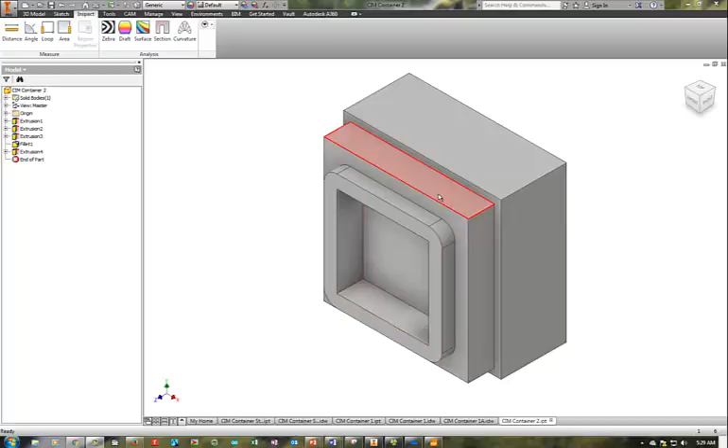Here we are back with our partially completed CIM container. What we want to do now is create the top on the other side of the stock, and to do that we're going to project some of the geometry that we've already created here. So let's do that.

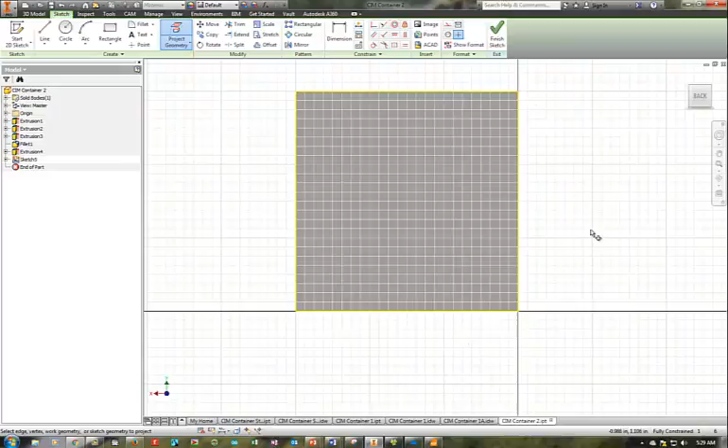Let me turn it around to the other side, create a sketch here, and I'm going to project again the geometry. Whoops, I don't want to do that. I want to project the geometry of the perimeter, and you can see the yellow lines indicating that. And I want to go back to the front side, and I want to project this part right here. So basically I'm projecting this perimeter so that I can have the sides of the top and bottom flush with one another. So let me do that.

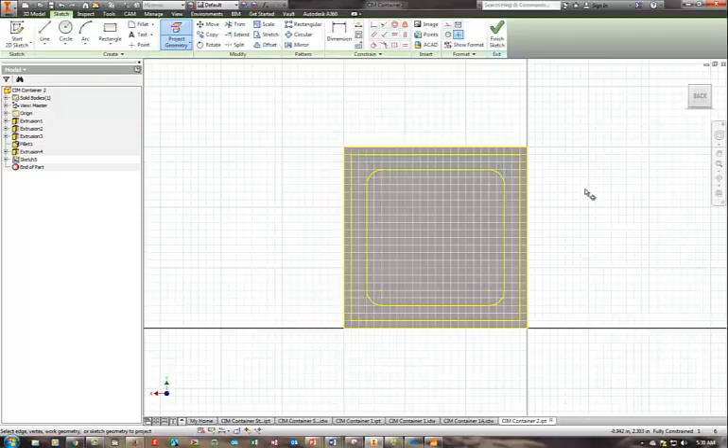I click there and take a look back on the other side. You can see that that's been projected. Now I'm only really interested in this outer one because I'm defining the outside sides of the top. So let me just go ahead and finish the sketch and extrude.

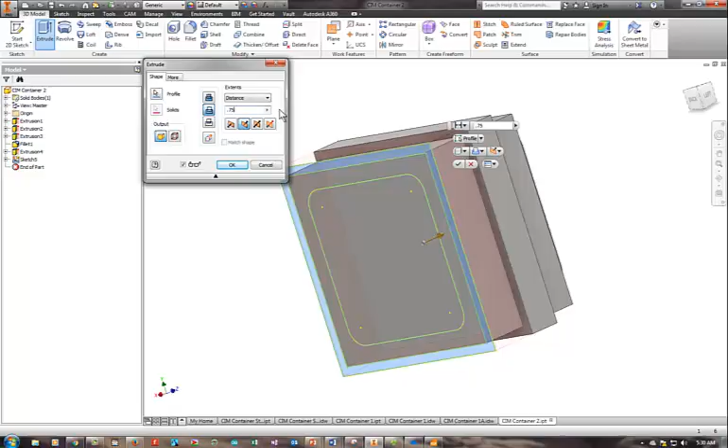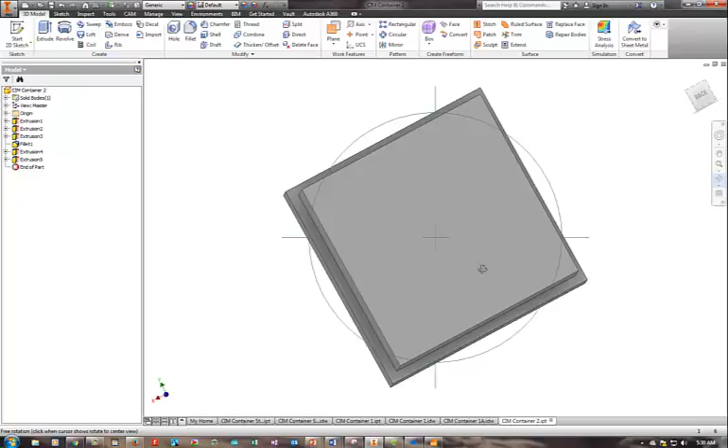And I do want to make that a cut, and I want to go down 0.75 as I did with the bottom. So now I've sort of gotten rid of all the inaccuracies and irregularities on my stock. I've got a nice, exactly dimensioned outside which matches my bottom here. And now I can proceed to make the hole here, which will again fit over this lip.

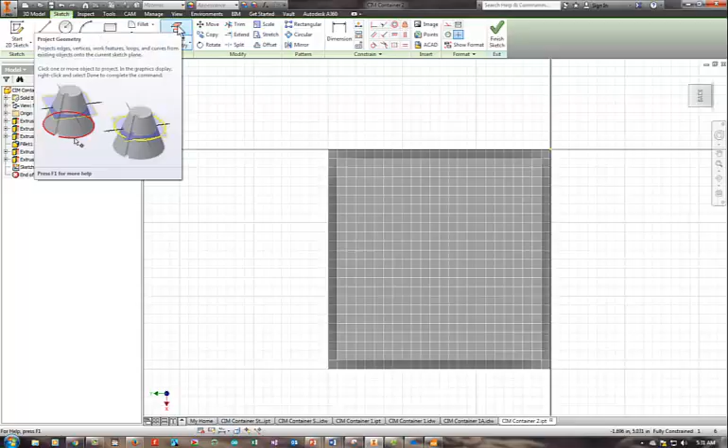So this side is a little easier. To do that, I want to make a sketch here, and again I think I want to project the circumference or perimeter there.

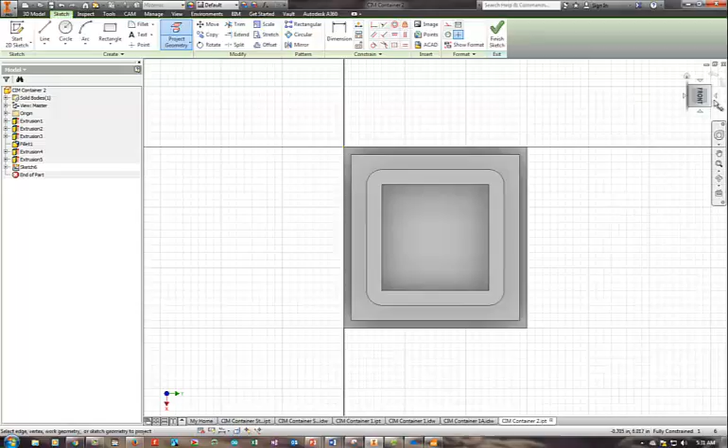And now what I want to do is find a way to get this geometry here that I'm highlighting, turning red, over to the other side, and I'm just going to pull it out a little bit to make it a little bit bigger so it fits over this. So to do that, I'm going to project the geometry, that geometry, and I am going to turn it around, and there it is.

So this should become clear maybe later after you've done this and thought about it a little more, but what I want to do is take this surface, this edge here, and pull it out just a little bit so that it fits over the other side.

And with the material we're going to use, we're going to start with a tolerance of 0.002 inches, 2/1000ths of an inch.

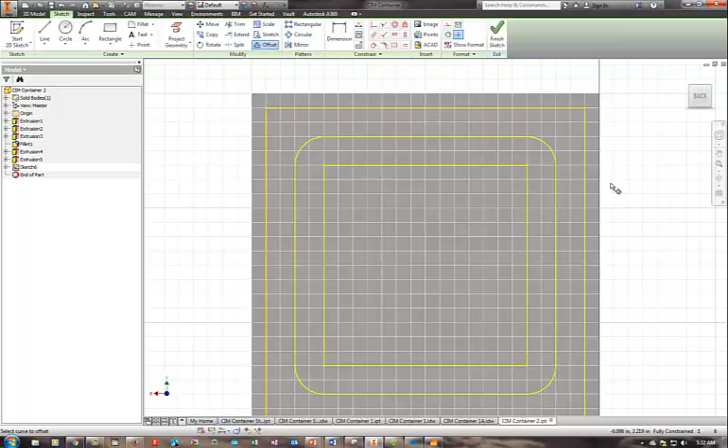Okay, so again I'm going to use the offset tool, and I'm going to zoom up a little bit, and I'm going to click here and pull out, 0.004, no, 2.

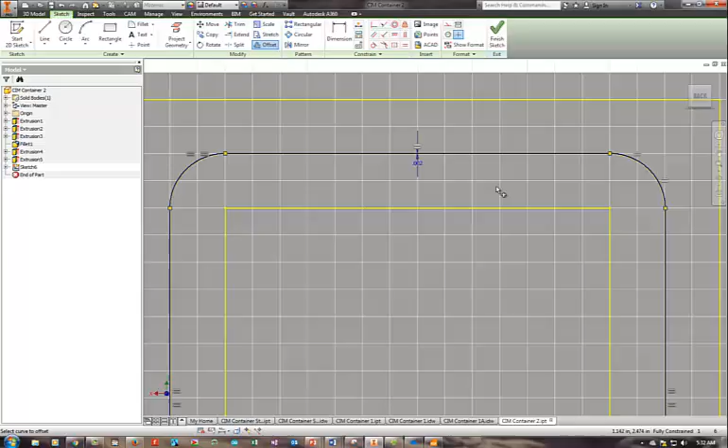So we're really asking our machine to be pretty accurate there. And as you can see, once I scoot up a little bit, that's a little bigger than what the other side has. So this guy is going to fit over this guy.

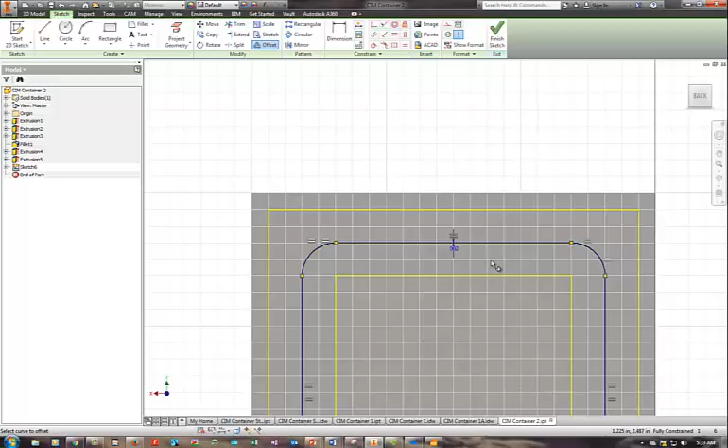Okay, now here's a trick that we can use. We want to extrude out everything inside the blue here. We want to extrude it in, and that'll be the cavity of our top, the interior cavity. A trick to get that to work, rather than having to get microscopic and click there and there and then there and then that's one more, I think, isn't there?

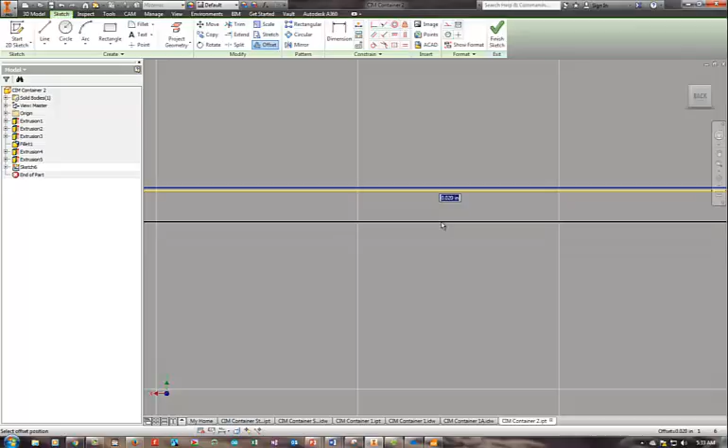There. What I'm going to do is turn each of these projected features into a construction line. So if I click there and there. Whoops. I think I'm still, oh, I'm still in offset. Okay, so if I'm outside of offset now, I can just make that a construction line.

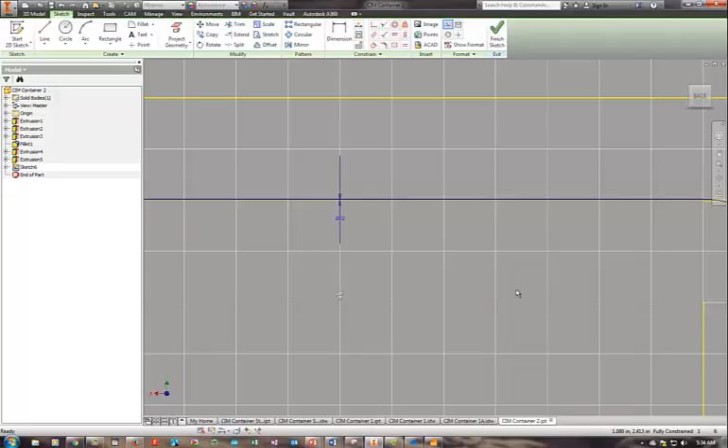So that is not going to be seen by the extrude command, and if I click here and then click the construction button, everything inside the blue here is going to be extruded now because I don't have a closed loop anywhere else but with the blue, because I've broken that up with the construction line and the object lines.

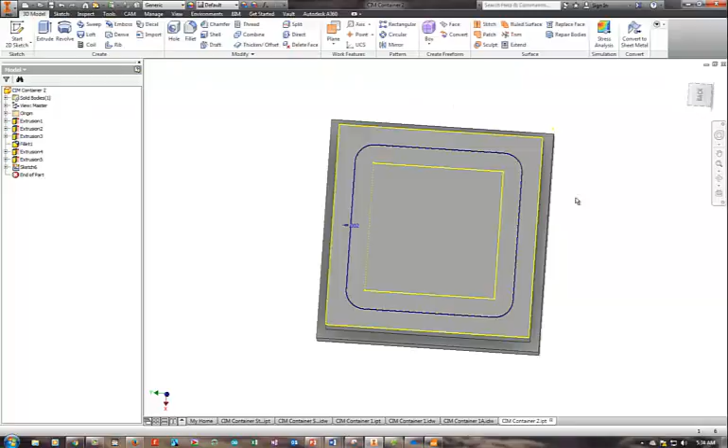So okay, let's just finish that, and now I am going to come over here and just click anywhere in here, and you can see that it extrudes out. Again, I want to make it a cut, and I want to go down 0.5.

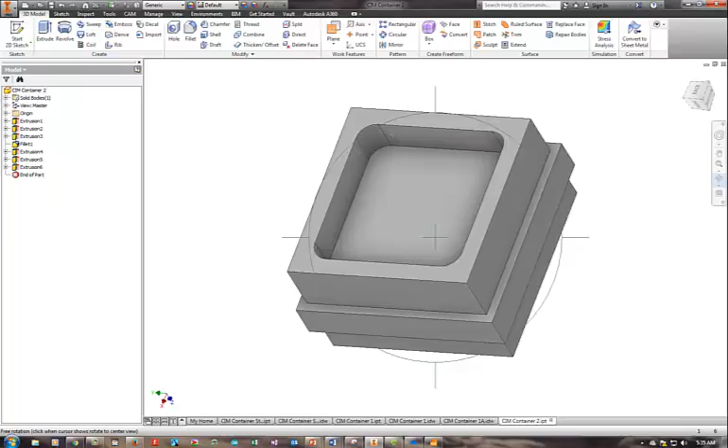And hopefully you can see that now that I've got this big old clamping boss here. This is my top. It's kind of a no-nonsense top of a container, but it's got an interior arc of fillet with radius 1/4, and that's going to fit over the top of this lip.

And there we have it. So that is the finished box before we do a few other things to it in Inventor. For example, we're going to split it down the middle, we're going to turn it around, put it in assembly, and make sure it fits together.

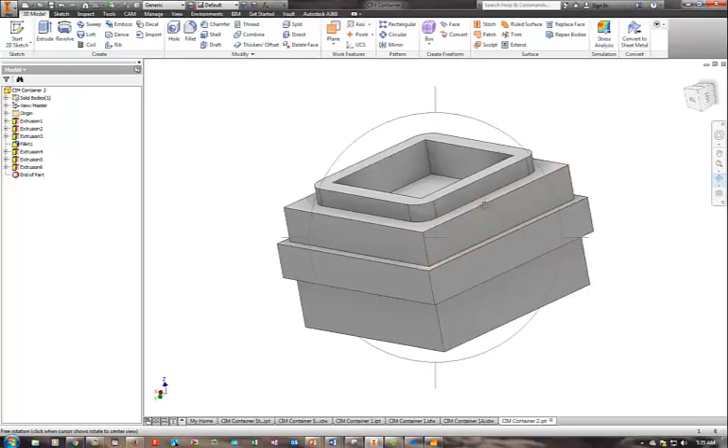We're going to make some dimension drawings, and we'll be on our way to doing some tests with the milling machine to make sure that that 2/1000ths of an inch offset, which is going to give us a total play of 4/1000ths, 2 on each side, is going to work. And let's just check that.

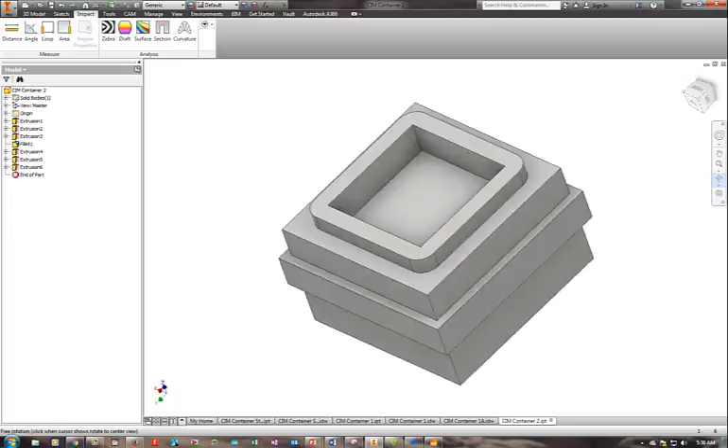So if we go to inspect distance, I'm going to go from here to here, and that's 2 1/4. So when I go to the other side, what do you think this distance should be from here to here? It better be bigger if it's going to fit over there, and it should be how much?

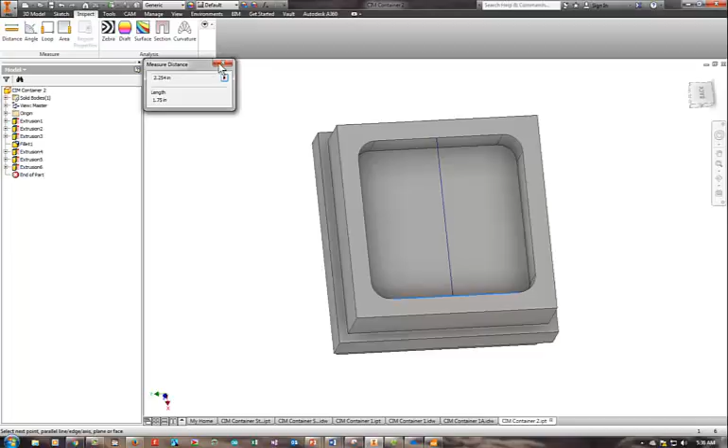Let's find out. 2 1/4 plus 4/1000ths. So the total play is 4/1000ths of an inch. So that's what we want. So let me save this. Okay, CIM Container 2, fair enough.

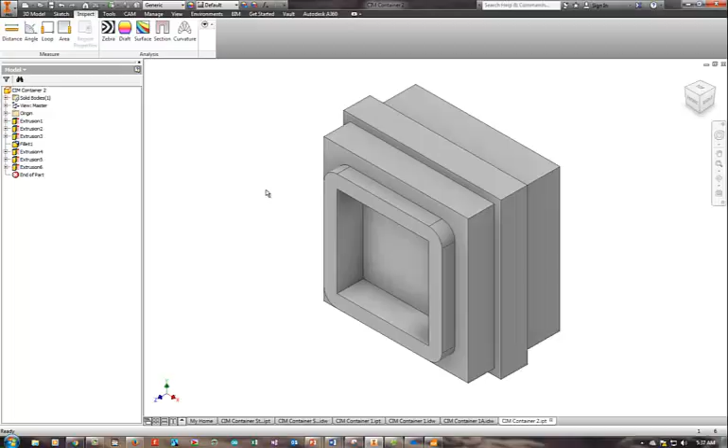Now what we want to do is take this thing and split it. The way I'm going to do it is as follows. I'm going to go up to the split command, and I'm going to choose the second one down, which is to trim the solid. That trims away a chunk of the solid based on a construction plane, and I am going to make a construction plane right here.

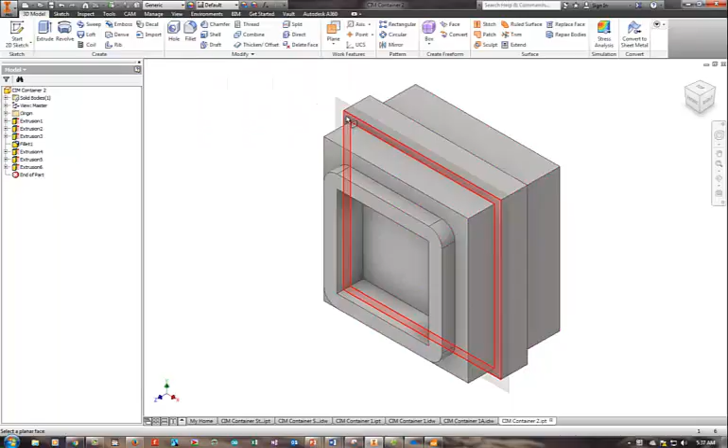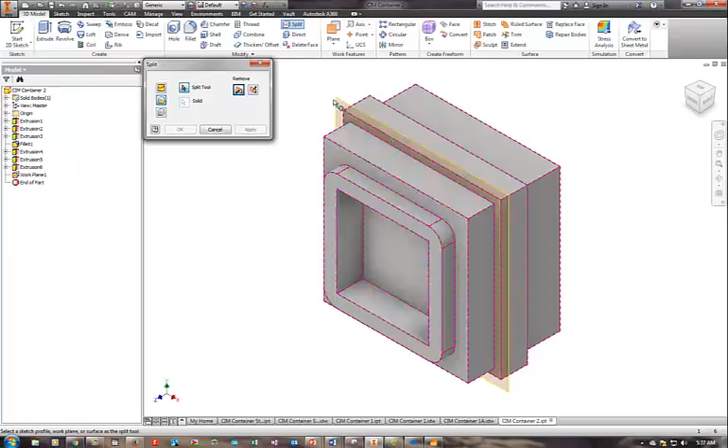Actually I should have made that first, so now let me go to the split command. This one is called trim solid, and I'm going to choose one of these removes and we'll see which one goes away. So if I click there and apply, voila, it goes away.

Now I want to be careful here that I don't save this immediately, because then I will have lost my other parts. So I want to go File, Save As, Save Copy As. This is going to be CIM Container bottom dot ipt.

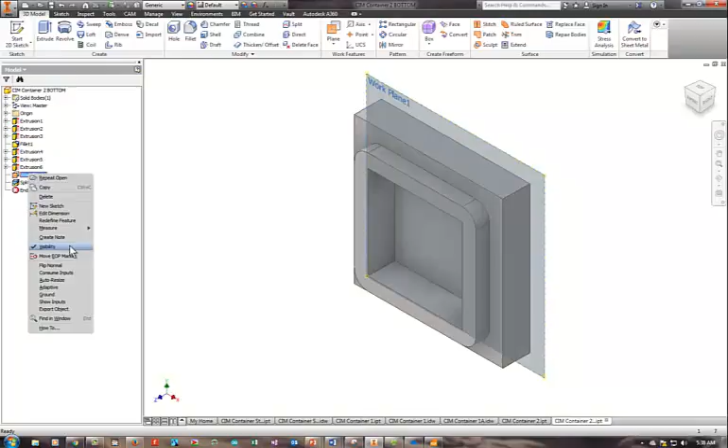Okay, not sure how that got there. So now if I open up and take a look at that guy, there it is. Let me detoggle visibility on the work plane. Let me also give it its own color so I can tell them apart very quickly.

So let's make that smooth dark forest and save, and that's our bottom.

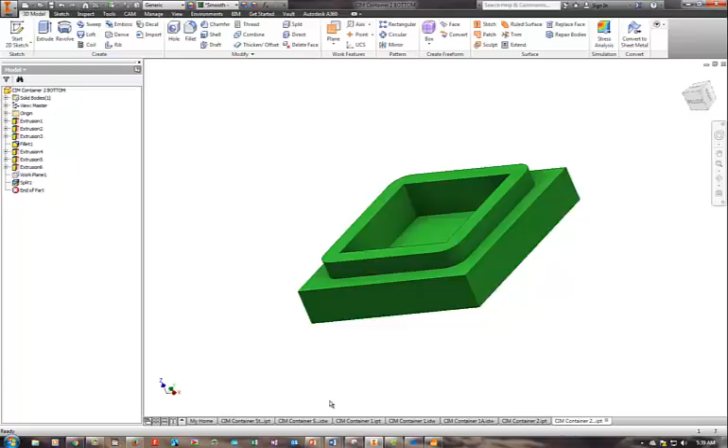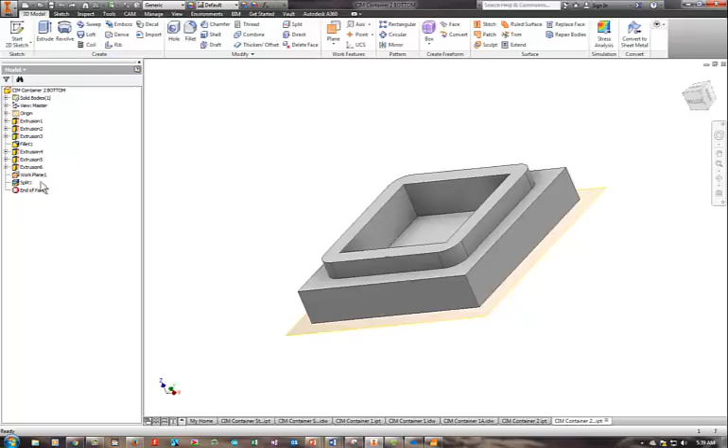Now, to get back to the original container, this one, okay, yeah, I think I still have that open. The trick here is just to do an undo, and another undo, another undo, and I can't do any undos anymore. And oh my goodness, let me just delete that. Okay, there we go. Hallelujah.

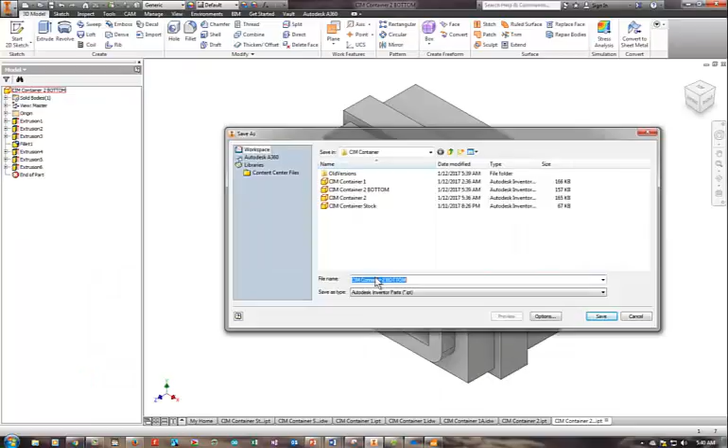Okay, and I'm going to delete this. So I'm back to my original part. I'm kind of screwing this up a little bit, but this guy needs to be saved as CIM Container 2. Sorry about that. Yes, replace it. Okay.

Yeah, let's close that. There's CIM Container 2. No. File, Save As. Okay guys, you're going to have to cut me some slack here. This is CIM Container 2.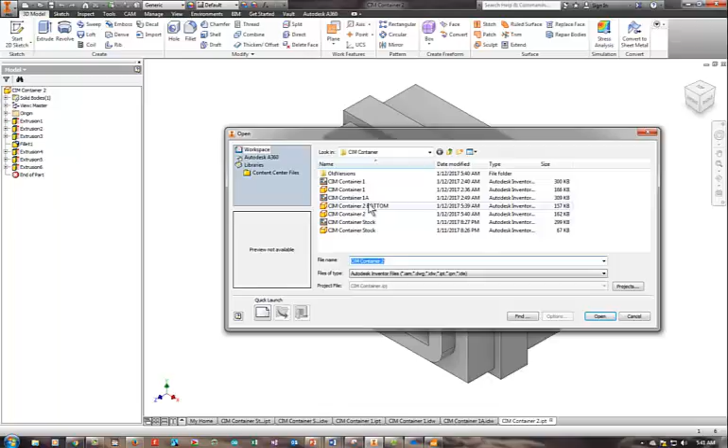This has both pieces. Okay, so now let's just make sure we have everything. So I want to open up the bottom. It's a separate part. And here's the original part. Now, okay, I want to get at the top.

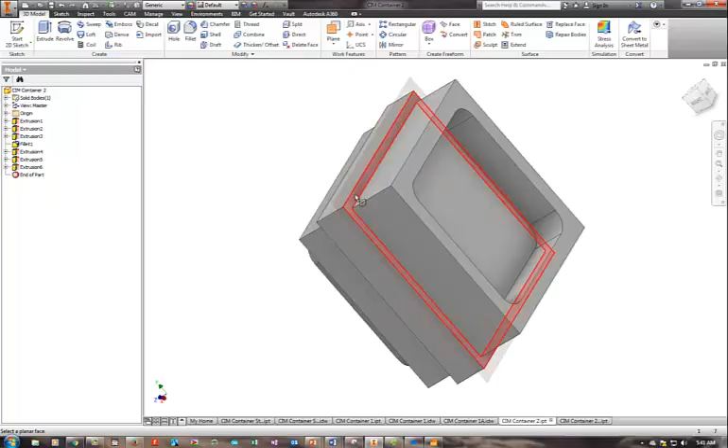So to do that, what I'm going to do is use the same technique. I'm going to put a construction plane here. So the way it works for me is to use offset from plane and just come right here and kind of hold it for a second and check it, and there you have it.

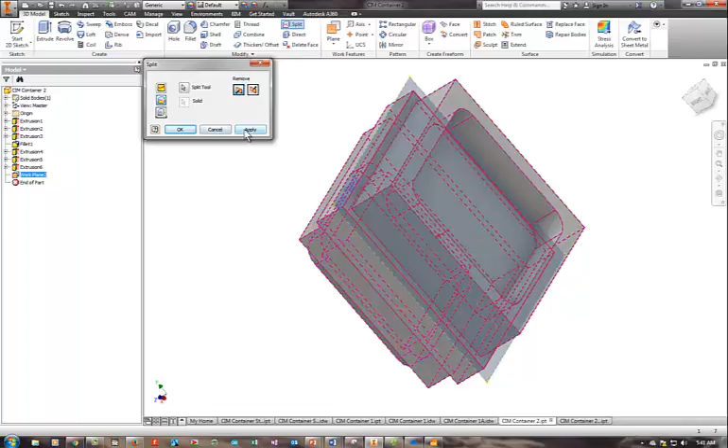So I'm going to now use split again. We'll choose the split solid, and I believe it would be the other one. No, maybe this one. Why can't I apply this? Oh, sorry. Okay, I want to go the other way. There we go. Apply. Okay, so this is our top.

So let me be a little more careful here. So I am going to make this work plane not visible. I'm going to change the color on my top to a nice contrasting color, perhaps purple.

And now I got to be careful again because this is CIM Container 2. I want to do File, Save As, Save Copy As, CIM Container 2 top, save.

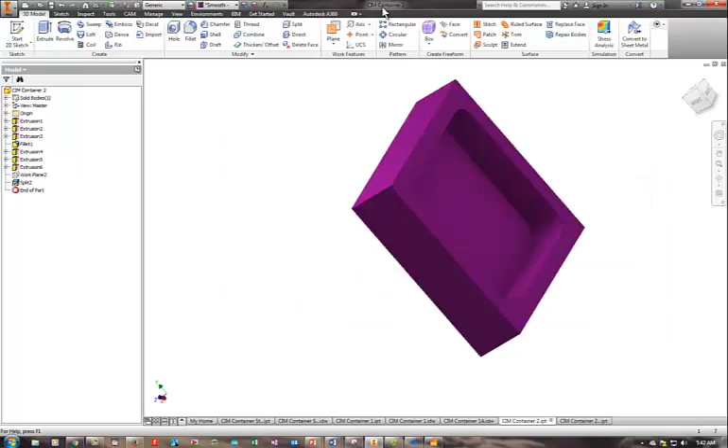Okay, so we're still on CIM Container 2, so now hopefully I can just undo my way back to my original part, and I'm good there. So let me just save that.

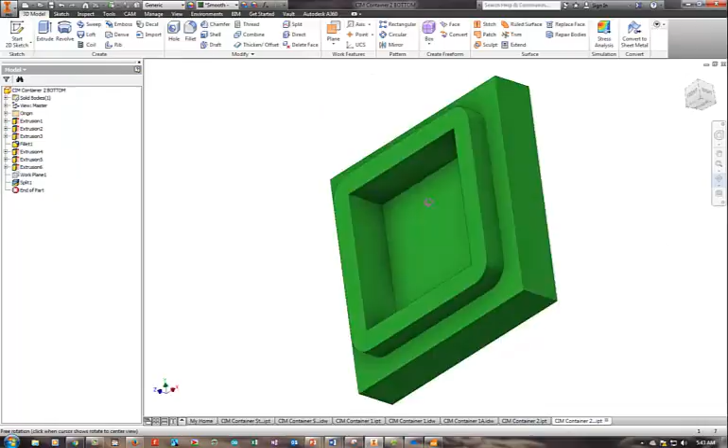So what you can see now is that I have my bottom here, and I'm going to open up the top. Here's the top, and this part should fit right over this lip.

Okay, so in the next video I'll put these together into an assembly, and we'll see how it fits together.